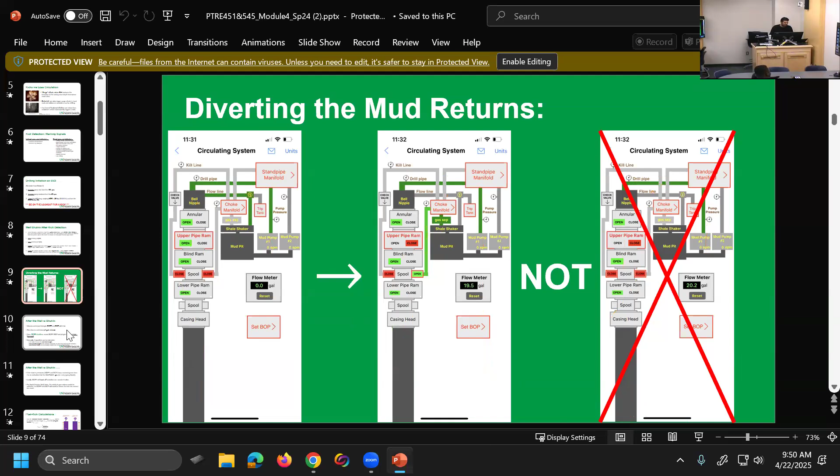You need to always make sure you have a route in and a route out. It's very easy to make a mistake. I make mistakes when I use the simulator sometimes. Anyway, you observe the SIDPP and the SICP with time, and you also observe and record the pit gain volume.

We did that for part A of the project. By the way, part A of the project, what fluid do you think you had? What kick fluid was it? I think, on my calculation, it's more of a medium crude. Okay, what density kind of?

The density was 7.5 something, and the specific gravity is 0.907. 0.9. Okay, yeah, so that was it.

What kind of density was it? Well, I went online, I searched for the density of oil and gas. So in that range, they put that range to be medium density. Yeah, but what kind of PPG? PPG 7 point, I can't remember, 7.5 or 7.3. I think it was 7.59. Yeah, 7.59. Okay.

I think it was, in real life, 8.77. It was actually water. Wow. It was a water kick. Yeah, it was a water kick. And I made that intentionally a water kick so that it will stabilize the pressure as well. A little bit lower than it was, I guess, was it 7.77 or 8.77, something like that.

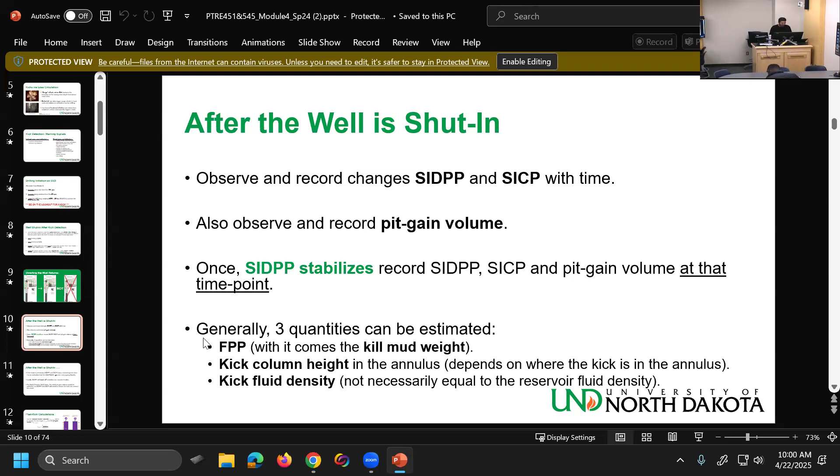If it's gas or a very gassy liquid, you have a problem, it's moving — then you need to wait for the SIDPP to level off at a constant value or something. Then it becomes a little more complex, it's advanced really. But for liquid or heavier fluid as you had, the initial pit gain volume would be sufficient, along with SIDPP and SICP, which will stabilize. If it's gas or something, sometimes you need to know pit gain, SIDPP, and SICP at the same time. But for a heavy fluid, SIDPP will stabilize, SICP will stabilize, and then we look into the pit gain.

Also, you drill a little bit and then you got a kick. You need to take account of those losses in the active pit volume, right? When you are drilling, the active pit volume will go down.

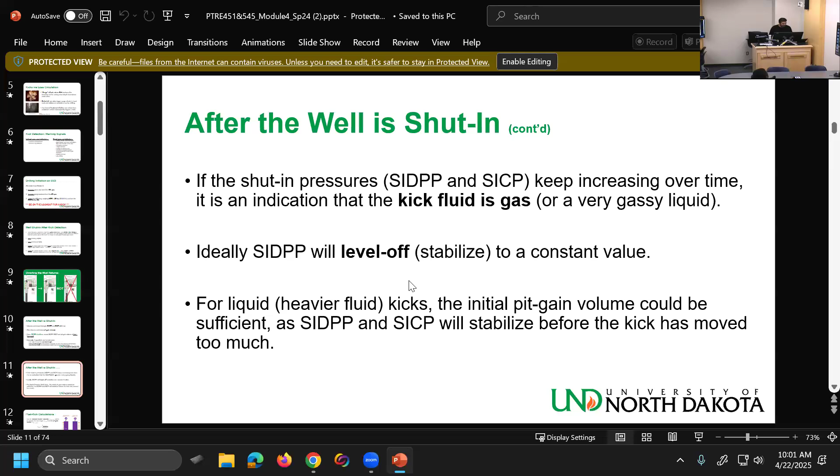This is what you need to do for the homework. And also, this is what I'm trying to tell you here.

These are two different densities. One is the real density, the other has to do with the pressure. So it can be gas at very high pressure - it will have a very high rho kmw. Or it can be water at very low pressure - it will have a very low one. But water is heavier than gas.

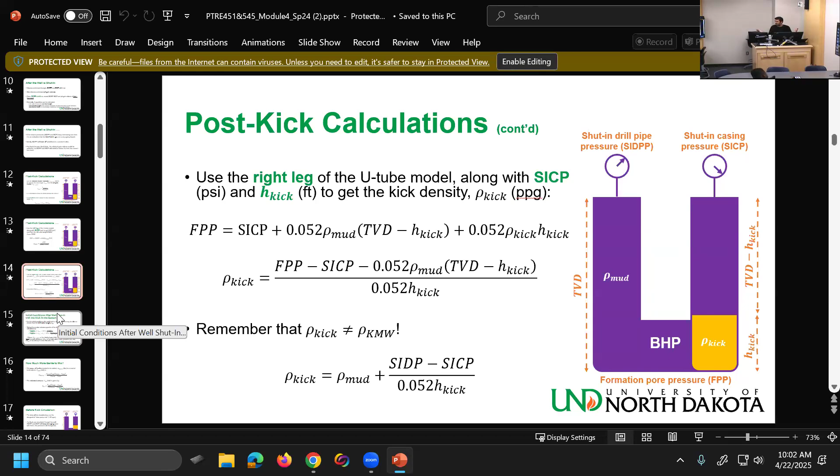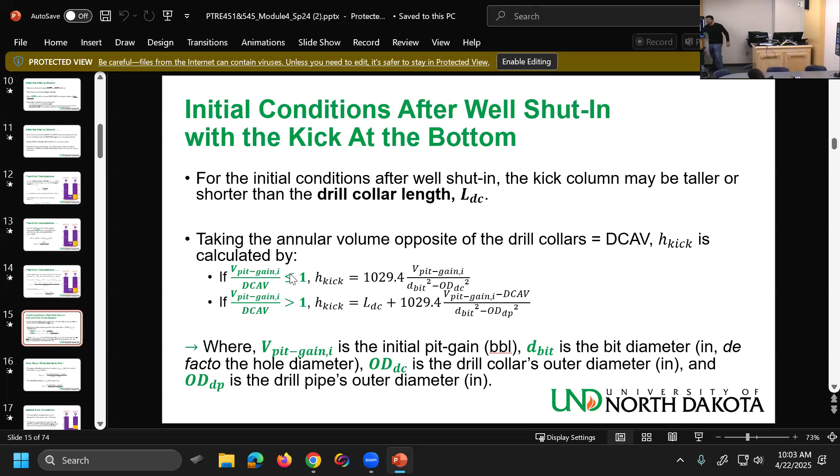Now, for the homework, which we might overview today or Thursday, you have the drill collar annular volume. If the original pit gain, which had to do with the kick you received, is bigger than that, then your kick goes above the BHA as well, so you need a more complicated equation. Okay, we saw that.

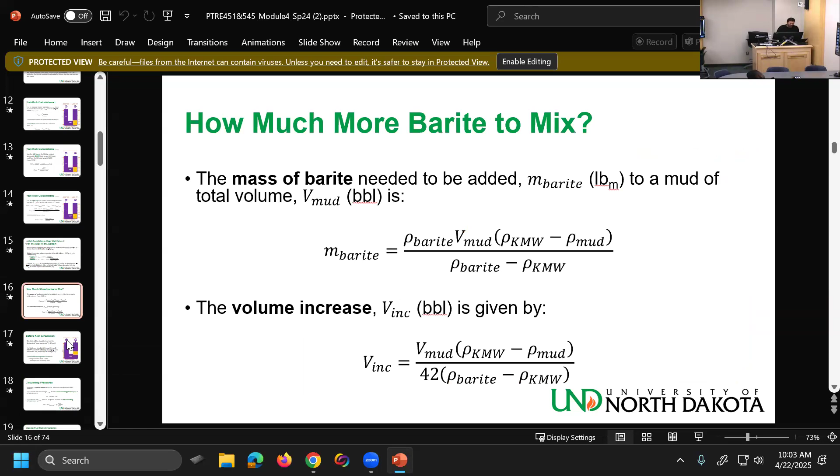This is practical stuff, how much barite you need to mix. I hope you use these equations, or if you are in the field, you have to use them. It's very easy. Even in the project, I'm expecting you to tell us how much barite you need to add, because this is what the mud engineer will tell the people under him, how many sacks of barite to mix, etc.

And now you're going to start circulating at the rate you determined earlier. You will basically play with the choke as it happens, such that you don't take any more kick. You keep the BHP bigger or equal to FPP, slightly bigger but not too much, so you don't fracture the casing shoe. Okay, and this is what you are going to do for the second project.

We estimated, before we started drilling, the frictional losses at 40 SPM. Did you do that for your project before you started drilling? I think we pumped it at 40 and 100 - normally this is what you need to do, so you know the frictional losses before you get the kick, because you cannot do that during the kick. When you get the kick, you have drilled further, so your well is deeper than when you did that estimation, but not by much. That's the idea.

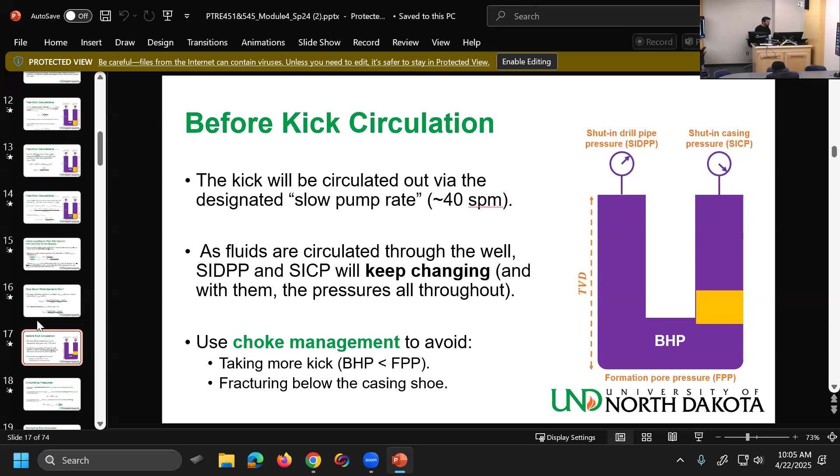Okay, good. That's the delta PX that we talked about. In part B of the project, because you already have the kick, I gave you the value - it was like 850 or somewhere there. Then you add that to the SIDPP, and this is going to be your initial circulating pressure, known as ICP.

And then you will have a kill mud weight at the end, a new mud circulated in. You don't know the frictional losses at that new mud weight, right? You don't know it. So you estimate, approximate it using this delta PX from the lower, and then the new mud, which is higher than the old mud.

So if in part B of the project I gave you 850 or something like that for the delta PX, and your rho kill mud weight is 11.3, your original mud was 9.6, you do 850 times 11.3 divided by 9.6, right? And you're going to find a value that is bigger than 850. If it's 850, I don't remember exactly.

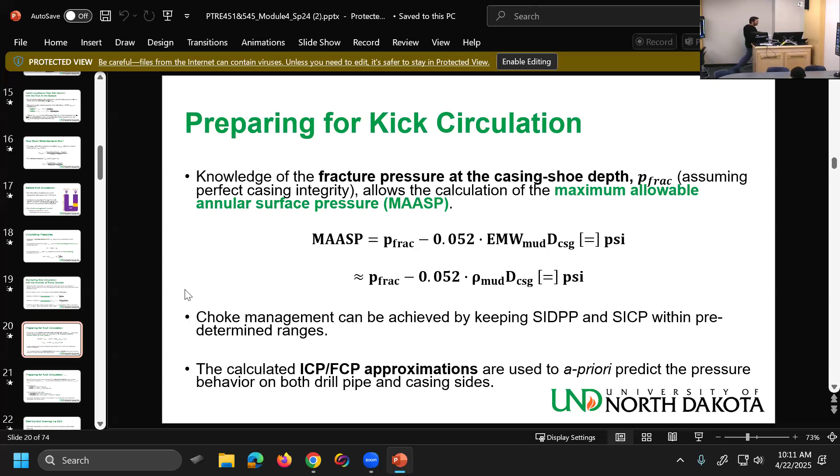So depending on these values, what you just said is important, because there are two ways we can do this kick circulation. One involves two circulations, one involves one circulation.

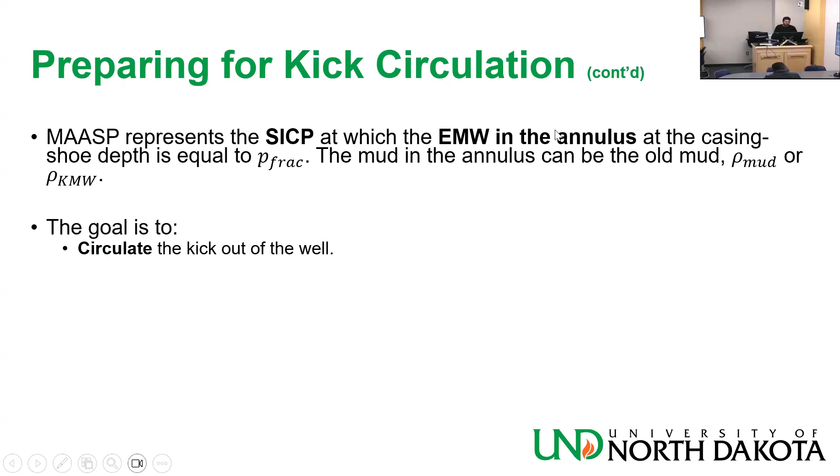MAASP represents the SICP at which the EMW in the annulus at the casing shoe depth is equal to P-frac. The mud in the annulus can be the old mud or kill mud weight -- it's unlikely that it will be kill mud weight.

The goal is to circulate the kick out of the well and replace the old mud with kill mud weight throughout the entire well. This can be achieved with two main methods.

One has two circulations, and we call that the driller's method. First, you circulate with the old mud weight to get the kick out. You get to the point where you have two positive but equal SIDPP and SICP -- and they will be equal to what value?

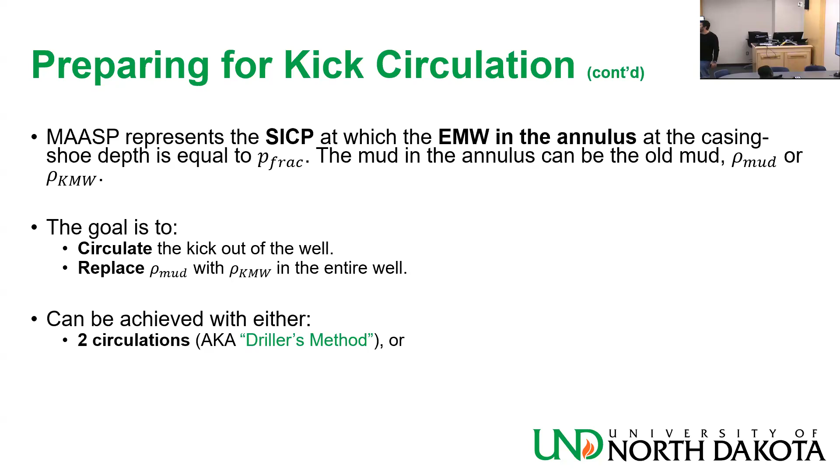At what point? When you get the kick out, and the well is shut in with the wrong mud, no kick inside, so they are equal -- equal to what value? The original SIDPP. Okay, so the SICP will change in that first circulation, and it will eventually go down to the SIDPP. It will go up and then go down.

We'll see that in the homework. And then we do another circulation with the kill mud weight to replace the mud. And what would be the values at the end? Zero, zero on each side.

Okay, good. And the other method is the wait and weight method -- I have a mistake, it should be 'wait' and 'weight' with a T at the end, I'll fix it. Or the engineer's method -- you do it with one circulation.

Undergrads are going to use the two-circulation method. Graduates are going to use the one-circulation method in the project. They both work.

There are scenarios where one might work better than the other, but as my old drilling professor used to say, regardless of where you are, the most important thing is the experience of the crew. If the crew is more experienced with the driller's method, use the driller's method. If more experienced with the wait and weight method, use that. Offshore, and in other cases, you may not want to use the driller's method for other reasons we're going to see, but that doesn't mean it cannot work.

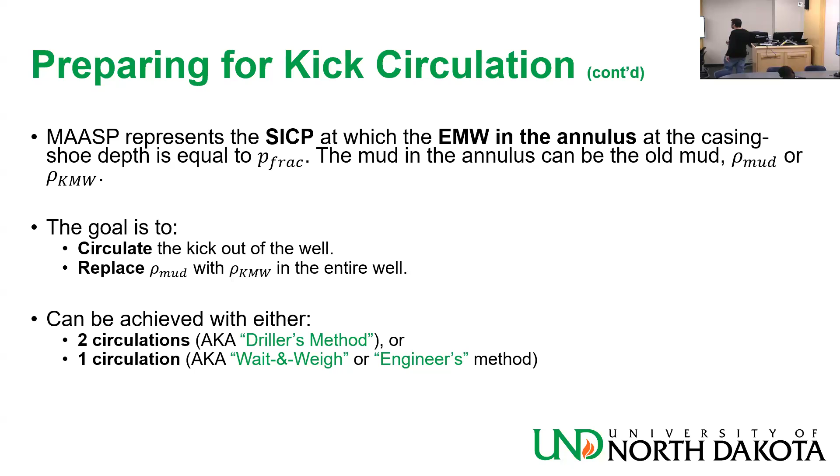Other kick circulation methods are possible, like the concurrent method, which is a hybrid of the two, lubricate and bleed, volumetric, etc. And who knows -- some of you may go to grad school and invent a new method.

There are several ways you can do it. The driller's method and the wait and weight method are the more fundamental ones. Concurrent is like a hybrid of the two, a modified wait and weight method, to be honest. It's more close to this one than that one.

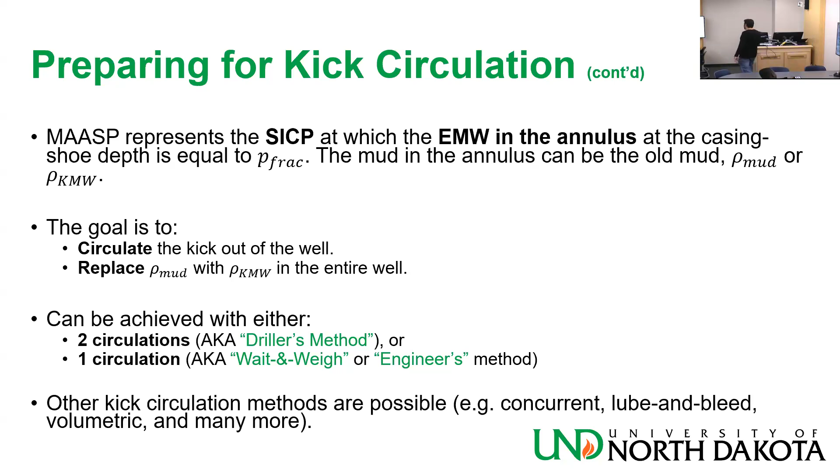Several ways you can do it. Okay, what is that? Well-control training using Drilling Simulator 3.

The way I do it, to make it easy for students to understand, because it's a lot of stuff, a lot of details, it's an operations-based class. So I came up with two simulation exercises to help you learn. They are about 15 steps, and we already covered 8 of those 15 steps.

There are some differences from one to another, but if you do this exercise with the default setting of the app, which is an onshore case, you are going to learn and be good to go. And I make you buy the app. I didn't want you to just use it for the project, so you use it to learn as well.

And I suggest that you do those exercises before you go for well control certification as well. Which exercise? The one that we're going to see. You can also do the project again, but the project is a little bit of an advanced case of offshore. You have to do extra stuff.

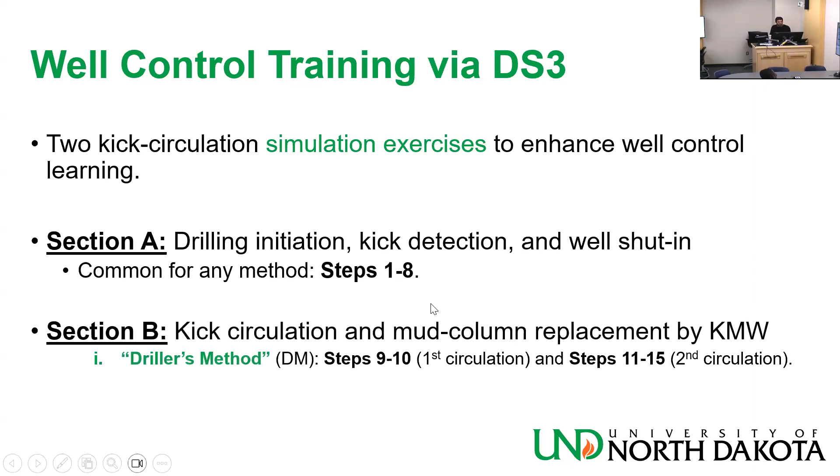Section B is kick circulation and mud column replacement by kill weight mud. Driller's method is steps 9 and 10 for first circulation and steps 11 through 15 for second circulation. Wait and weight method is steps 9 through 13, but is one circulation only. So we have 13 steps for wait and weight and 15 steps, or 11, for driller's method.

But the whole 1 through 8 is common, and we have already seen it, as I said at the beginning of the class. Okay, and I want to mention one second.

You know this movie, Any Given Sunday, from 1999? It's an American football movie. There's what's his name, Jim Brown, who was actually very famous—I don't know if it was Jim Brown or the Al Pacino character who was saying that. Al Pacino was playing the head coach, and Jim Brown was a very famous football player. He was a running back, but from very old times—he played for Syracuse University and was very good. But in the movie he was playing the defense coordinator. And one of those two has a quote where he was telling the players—I don't mean it in a bad way—that they're dumb enough, so they made the playbook simple. They made it real simple.

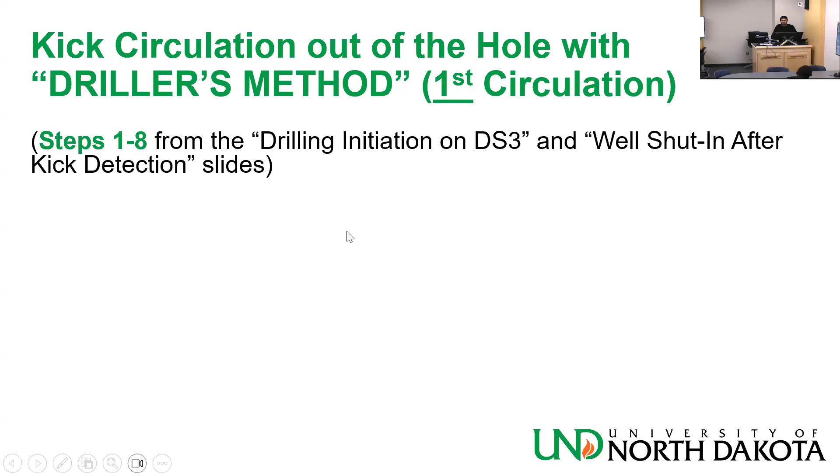Steps 1 through 8 are the same as we've seen before. Let me go back over this, since this morning I mentioned I need to review some stuff we already covered. This is step 1.

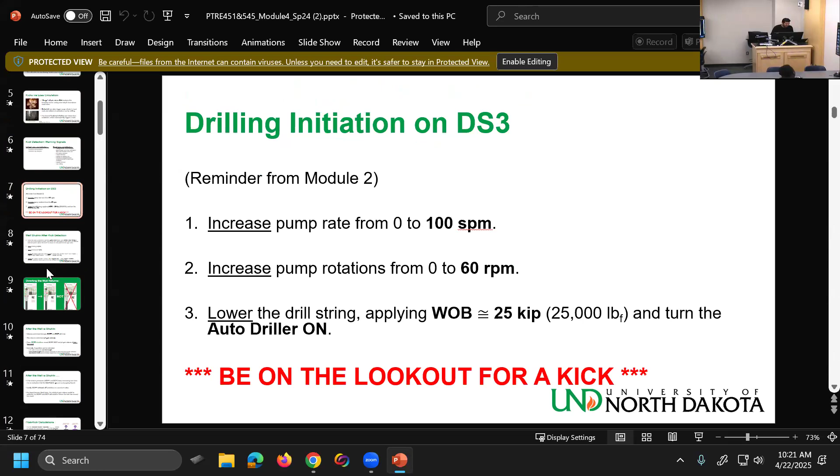Circulate is step 1. Step 2, rotate. Step 3, apply weight on the bit, and then you are looking for a kick. Step 4, remove the weight on the bit. Step 5, stop rotating. Step 6, stop circulating. It's very simple.

Step 7, close the BOP and open the choke line. Where it says choke in your rubric, it means choke line. Now step 8 is close the actual choke.

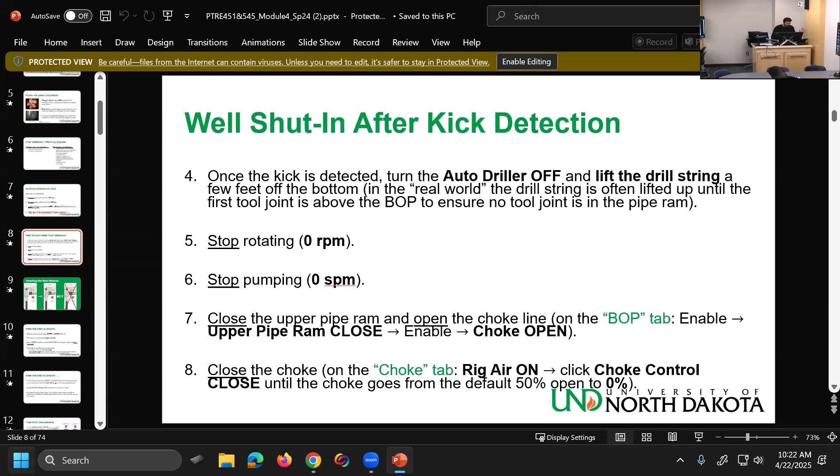Close that, and this is where we are now. You finish part A of the project and you're about to go to part B. This is where we are.

So step 9, you reset the number of strokes to 0, because you can't see what's going on downhole. You need to understand how far you are when you're pumping, so you reset strokes to 0 and know how many strokes you need to go down and then up, using those calculations with the 42 value.

Now slowly open the choke while increasing the pump rate at small successive increments until the slow 40 SPM pump rate is reached. You do it slowly until you get to 40.

Now, don't do it with the speed multiplier on. Because if the speed multiplier is on at 15 times, and you are opening the choke slowly while increasing the pump rate, it counts as if you're doing it 15 times slower. So if you have a small leakage at that time, the pressure goes down a little bit, but it goes down over a long time in simulation time. So make sure you're at times 1, not anything else.

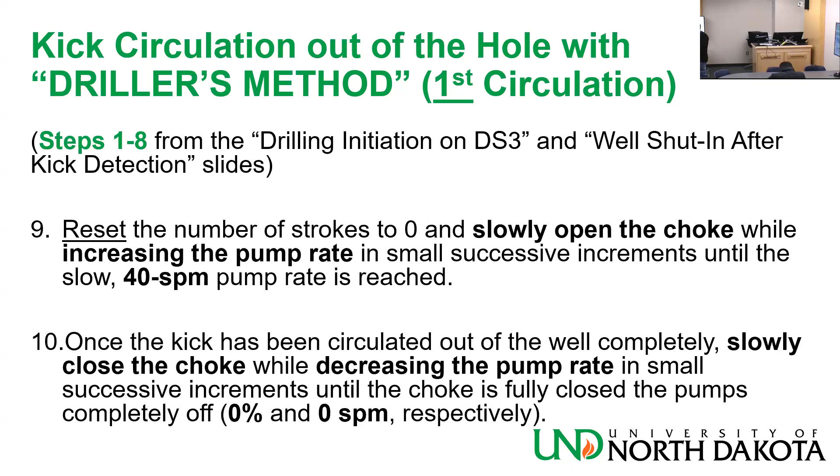Now, when the kick is moving up, it's going to be expanding, so it will be increasing. The SICP will be increasing. You need to be aware of that so you don't cause an underground blowout. Things are changing as you move up, and in your homework you are going to model that analytically.

Mud column replacement using the driller's method. Now we're in the second circulation. Change the mud weight: go to the kill mud tab, click enable, set the kill mud weight value, put in the value, and select the color of your choice for the new mud.

Now the app has some options for the kill mud weight. It's going to be a new color, it won't be gray as before.

Okay, it can be what? It can be brown, it can be purple, it can be pink, it can be green. I use green because we are at UND.

And I always say only girls are allowed to use pink. We had 2 girls in a group the first time I was teaching the class, and they both used pink, but it's really red—it says pink here, but it's red. When I made those videos, I had already signed to be an instructor here, so it was fall of 2022, and I was using green because I was coming to UND.

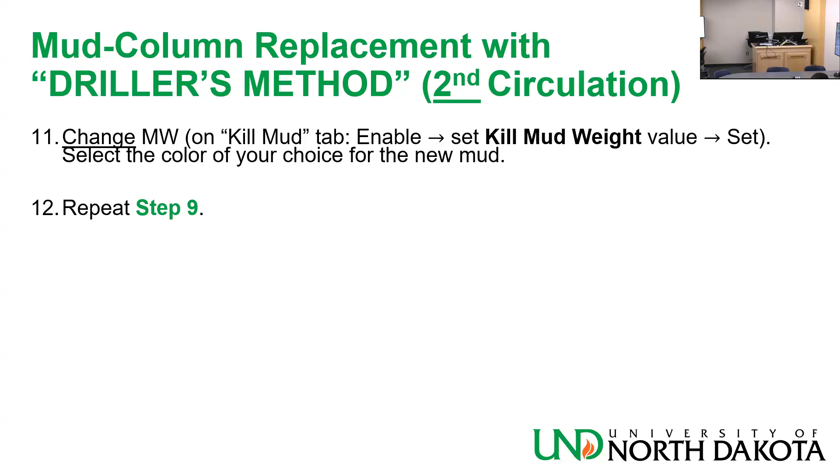Okay, and then you are gonna see the SICP change. And it's gonna change from that SIDPP original value plus delta px to, don't forget the frictional losses, to basically 0, because by the time you make it out, it's gonna be 0. All the frictional losses are gonna be gone on the choke side, on the annulus side.

Once the entire mud column has been replaced with a new kill mud weight, decrease the pump rate to 0 in small successive increments. Basically, that's a repeat of step 10. I should say repeat step 10 here. Once the entire mud column has been replaced, repeat step 10. Same way.

Okay, now I have my whole well filled with the proper mud weight, okay? And I stop pumping. So what should be my SIDPP value? Should be 0 unless you trap pressure. If you trap pressure, it'll be whatever pressure you trapped. That's correct. It should be 0 because I'm not circulating it. Yeah, this is correct. And can I break in one other pointer? Sure.

When you start with the kill weight mud, if you think about keeping the side of the U-tube constant, that has a constant weight of fluid, so as the kill mud's going down the drill string, you keep the casing side constant. Once the kill mud exits the bit, you keep your drill pipe pressure constant. Yeah, but it might not be possible if you have a gas kick, because the gas kick has the propensity to move on its own. If there is a big difference in the density between the kick fluid and the mud, you are basically fighting that.

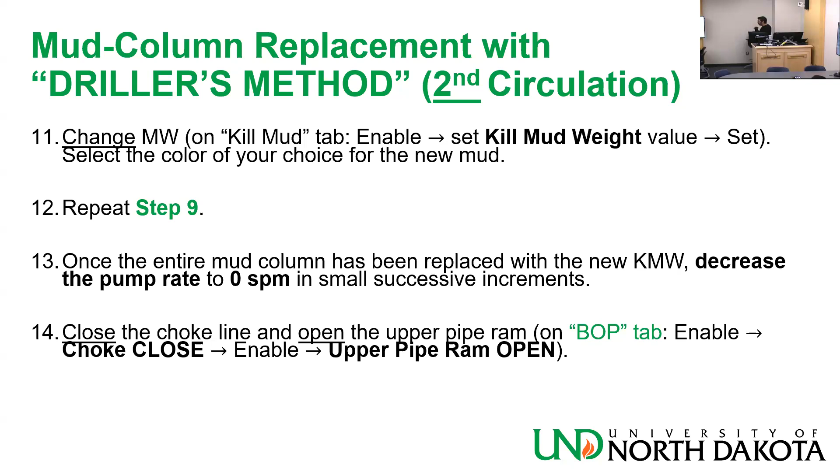To make it simple, even simpler. And thank you, Justin. Step number 14 is I go back, close the choke line, and open the upper pipe ram. In your case, is upper choke because it's an offshore case, but no big deal. And open the pipe ram. So I went the other way. When I was shutting the well, I closed the ram and then I opened the choke line. Now I'm going the other way. I close the choke line and I open the pipe. I go the opposite. And I open the pipe ram, right?

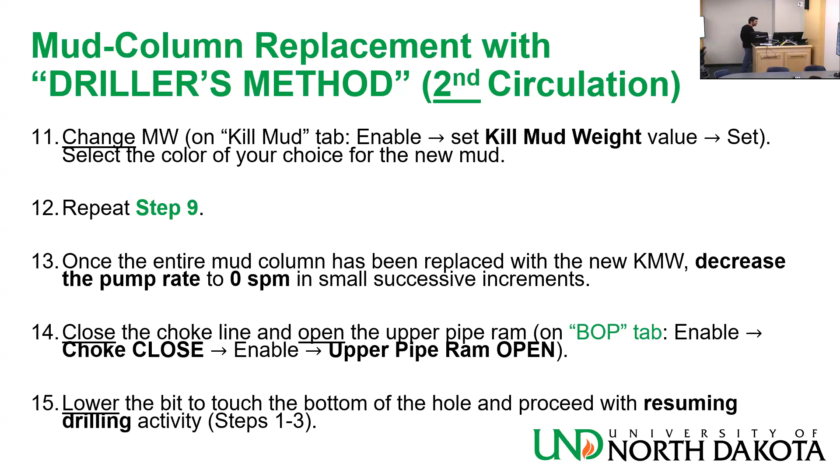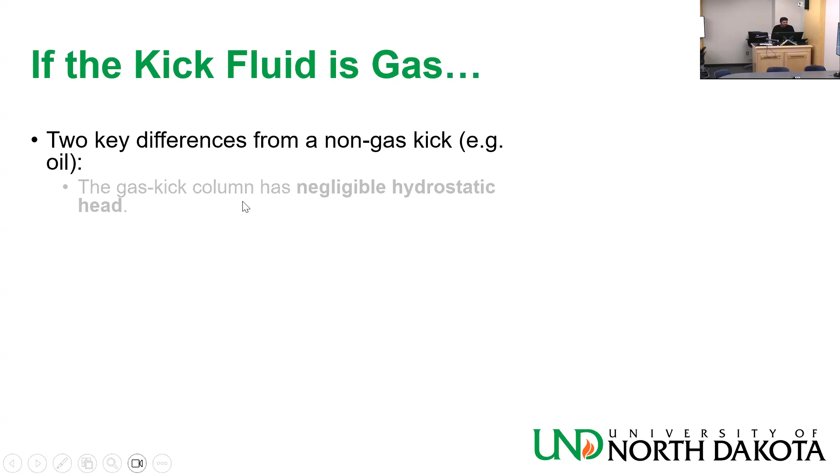If the kick fluid is gas, this is what I misunderstood what Justin said, and I thought it was the first circulation. If the kick fluid is gas, you have 2 key differences from a non-gas kick. The gas kick column has negligible hydrostatic head, potentially. So the kick column size is impacted by temperature a lot. And this is where you have to have an accurate, what we call EOS model, equation of state. The equation of state tells us how the density of the gas depends on pressure and temperature, density of the kick as a function of pressure and temperature. So things are changing during the circulation.

And also there is the buoyancy effects that you are fighting against. So the kick is moving as you are trying to make it move, it's moving faster than what you are pumping. And it's also, density is changing as you are moving.

So as you are circulating out, it's like creeping on you, you know? You are not comfortable. Many times circulations can take days, and you do many circulations, somebody on the rig floor is making jokes, etc. It can really creep on you and make it a bigger problem. You need to constantly be looking at the pressures. Sometimes you may be waiting and not doing anything, and the pressures are changing. Sometimes both pressures are changing just because the kick is moving very fast, and then you need to be manipulating the choke accordingly without even circulating. So it can be very, very bad.

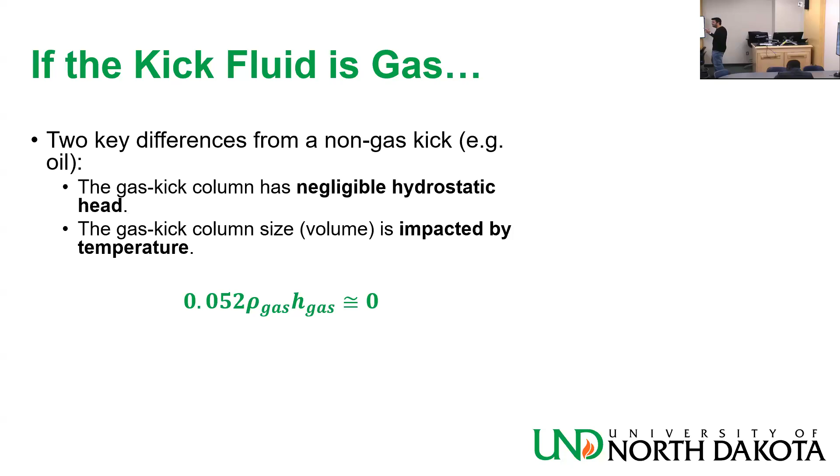Okay, if you choose to neglect the gas density, assume that this term is 0. So the height of the gas matters because this is basically taking part of the mass. That's why the SICP would be higher than the SIDPP at that point. This is what you are dealing with.

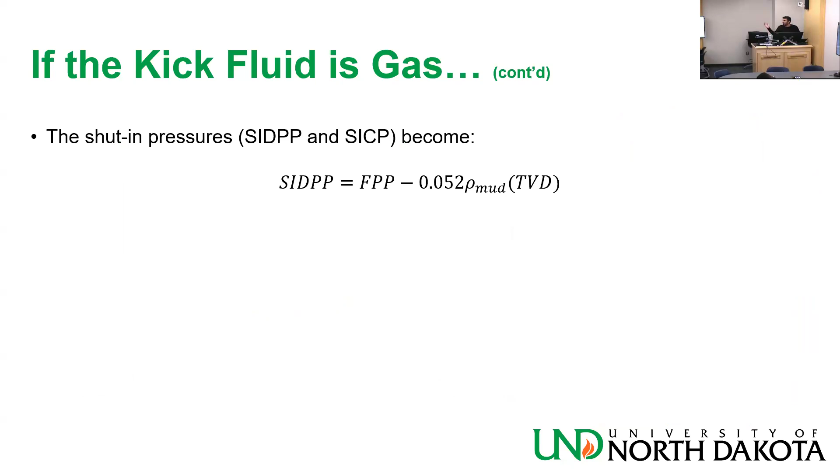You combine the two, you get this for SICP, because you recognize that this part is basically: what is it? This TVD is basically H above, H below, plus H gas. Now you take the H gas out, so you are left with H above plus H below, so the TVD goes away. Okay, fairly easy to understand. Let me just write it here to avoid confusion: TVD equals H gas plus H above plus H below.

So you have this and this now, and you assume that rho gas is equal to 0. So this ideally would have another term here, minus 0.052 rho gas H kick, but this is 0, so it goes away. That's why you don't see it.

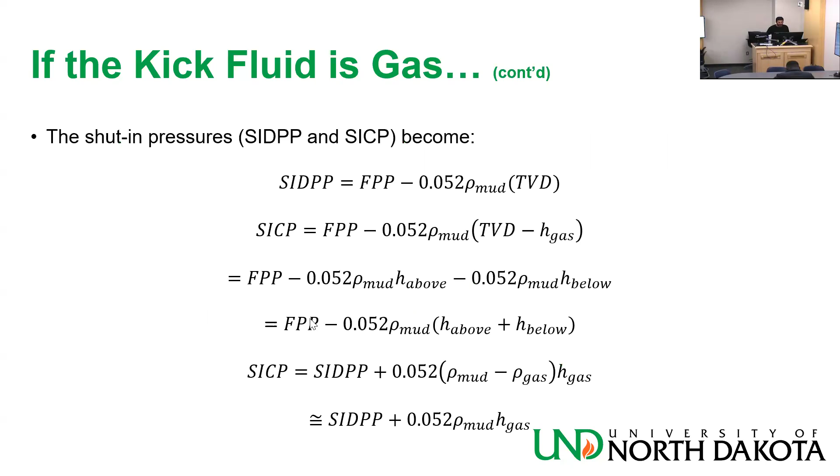Okay, I do SICP plus how much this weighs. Now if I want to go here, I do SICP plus how much this weighs plus how much this weighs. How much does this weigh if the density of the gas is 0?

Is it 0? Okay, so the pressure here would be the same as the pressure here, right? Yes. Okay, you understand that? The pressure here, if the density of the gas kick is 0, is the same as the pressure here. Donald, do you understand that? Yes. Okay, it is important, that's why I'm asking.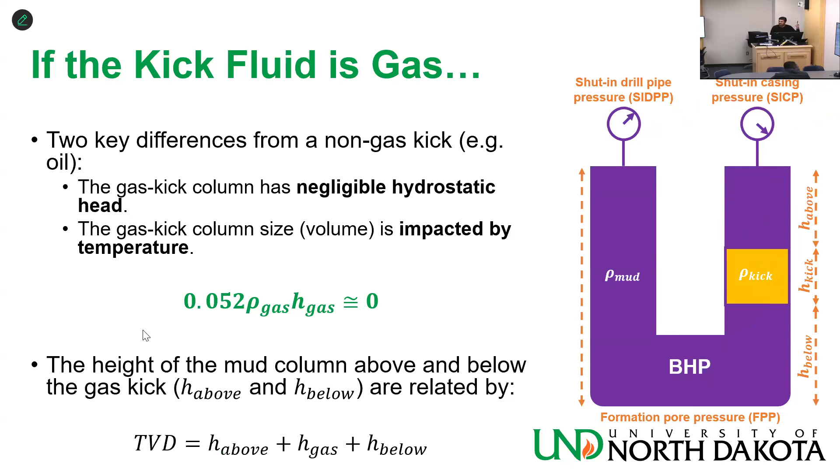It's a weightless kick, worst case scenario.

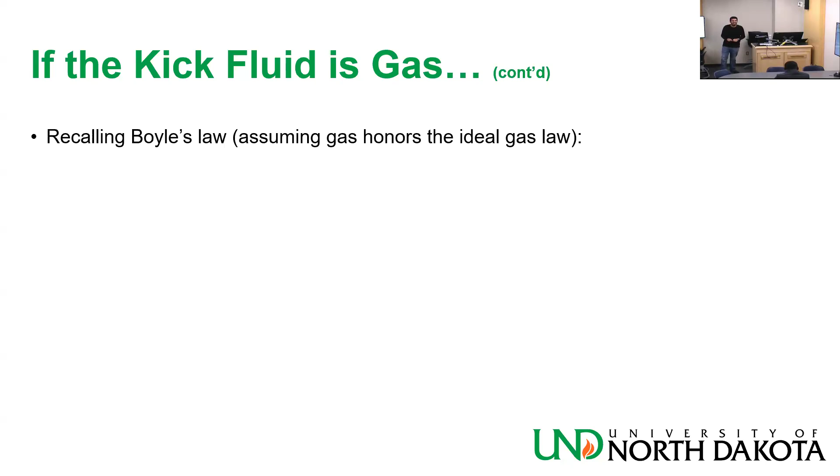So recalling Boyle's law from physics, you remember Boyle's law? Yeah, I remember. Pressure and volume are inversely related. A more advanced version has a constant temperature. But if I have the temperature in, it will be like this.

But for our method, this is the original pressure when the gas was in the reservoir, in the rock. This is the new pressure when the gas is at the kick, inside the well. This is temperature before, temperature now. I'm gonna actually assume they are the same, so they're gonna cross out.

And then the V gas initial is the volume before, as soon as we got the kick. And the V gas now is the volume now, as the kick is moving up. I assume that once I got the kick, and the kick is at the bottom of my well, its pressure is the same as the pressure it came from the reservoir, and the volume is the same volume as the original V gas, right? Okay.

And the pressure would be P gas initial. And then it's gonna be moving up. Pressure will be changing, basically according to Boyle's law. So I will simplify things. Isothermal, this goes away.

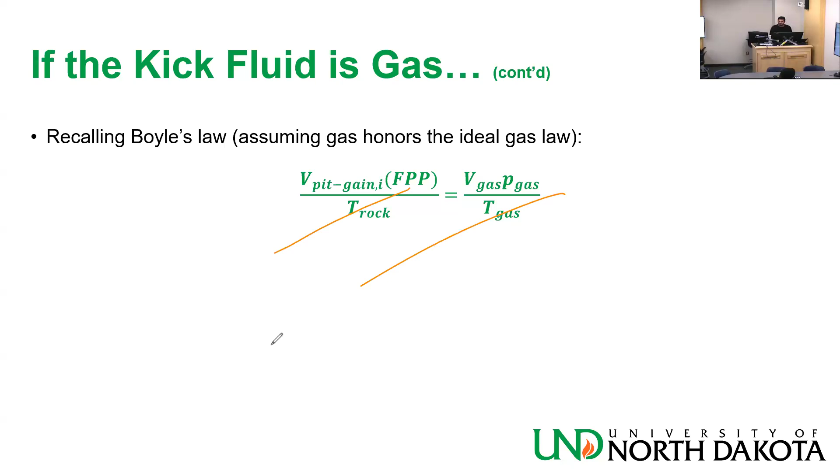That's one simplification. And then substituting the expression for V gas from the previous slide, I get this equation. Remember the expression from the previous slide was this: P gas equals SICP plus 0.052 rho mud H above. And then V gas is this, SICP minus SIDPP.

So I come here, okay, I have a value for this, C annular, SICP minus SIDPP. What was the bottom? I don't remember, I actually can't remember. And then V gas is something else.

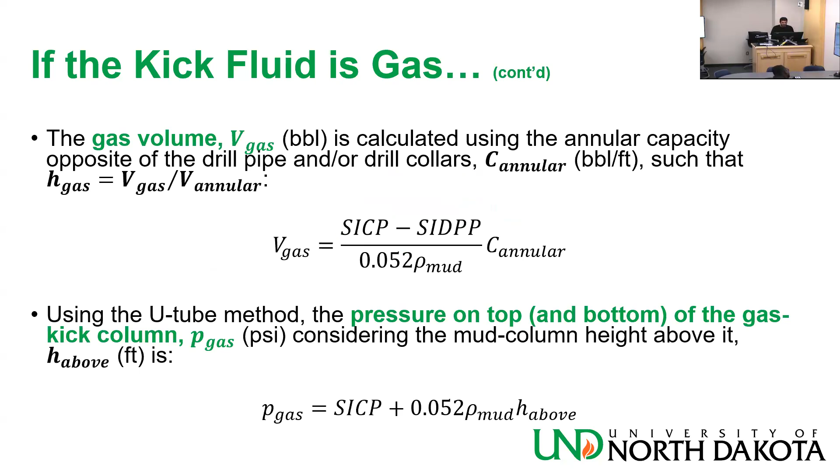Sorry, I was wrong. V gas is that value with the C annular, the fraction. And P gas is the long equation. So, one second. This is V gas, this is P gas. Take those, put them here, rearrange, and you get this.

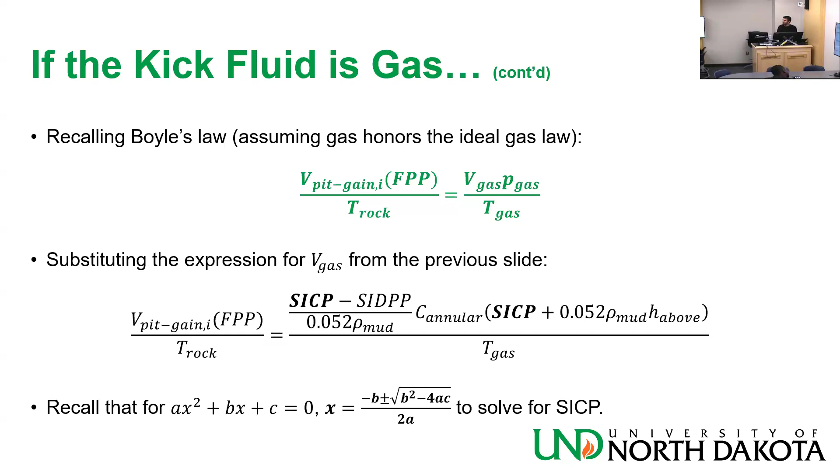Okay, now I want to solve for SICP. That's why I have it in bold. This is the variable I want to bring to the left. Okay, I want to bring it to the left. And then I get, remember that this equation from the math for quadratic equations.

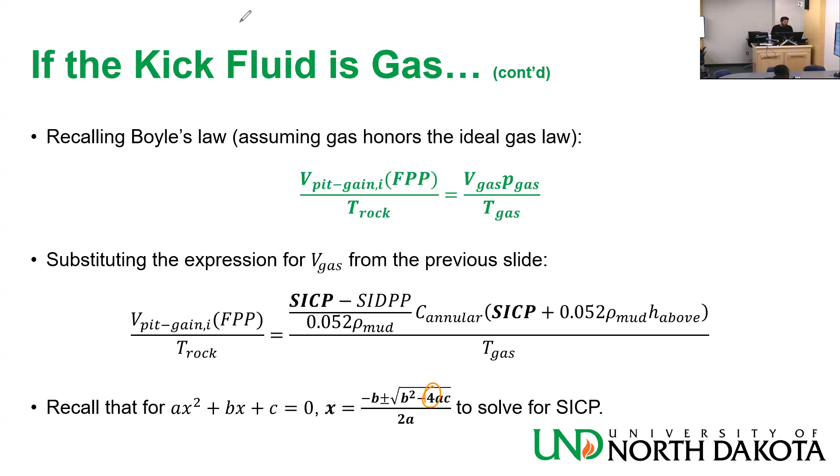Okay, I will end up with this. I want you to be able to derive this equation, every step of the way, and I will tell you why. Because this number 4 is not the same as this number 4 here. It's complicated, but you can follow through.

I want you to be able to derive these equations, because this is what you are going to use in the homework. But in the homework, you have the slides available and you can do it. I want you to be able to derive it, and understand what it means. It basically models how SICP will vary during this first kick circulation.

And this is when SICP is at initial value, that's when the height above the kick is h above comma I, C annular I, V gas I, h above I, SIDPP I. I assume that normally SIDPP will stay constant, but it might be changing.